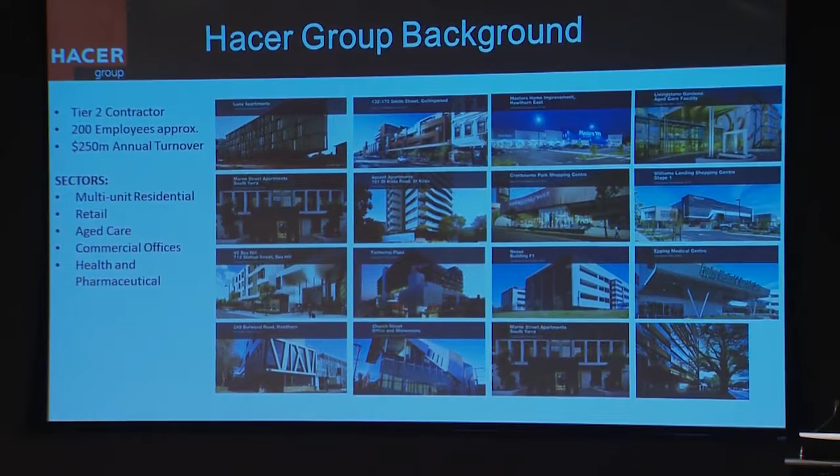A little bit about myself, my qualifications. I've got a degree in architecture, I'm actually a registered architect - as I like to say, a recovering architect. That also gives me the excuse to wear funky glasses, and I did button my shirt all the way up to the top to make myself look like an architect. Yeah, a lot of people pick on me for that.

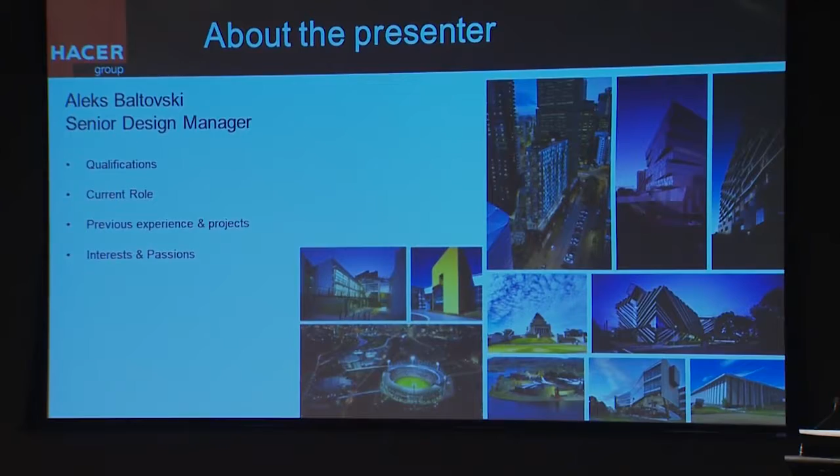But I am passionate about design, and one thing a lot of people don't realise is that I also have a qualification in construction management and economics. I spent a fair bit of time at university doing 2 degrees, and that's what I've loved about the role I'm in - it combines both the best of both worlds in terms of dealing with construction and design, and how design can be delivered into construction.

So my current role is senior design manager, I think that was covered in the introduction. In terms of previous experience, this is just a snapshot of the projects I've worked on, starting from the most recent one. If you work backwards, that was a project I worked on in Canberra in the late 90s.

In terms of experience, I've worked as an architect, as a design manager, as a contract administrator, I've even done time as a quantity surveyor - pretty much an all-rounder. So I've seen the world from all sorts of different sides.

In terms of interests and passions, there are probably too many to mention, but I am passionate about environmentalism and sustainability. One pet hate of mine is seeing waste, too much waste in any sense - time, money, resources, whatever it might be, materials.

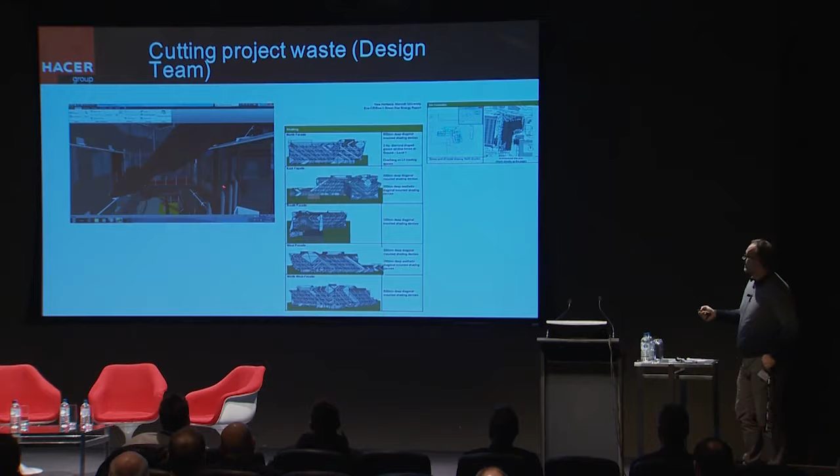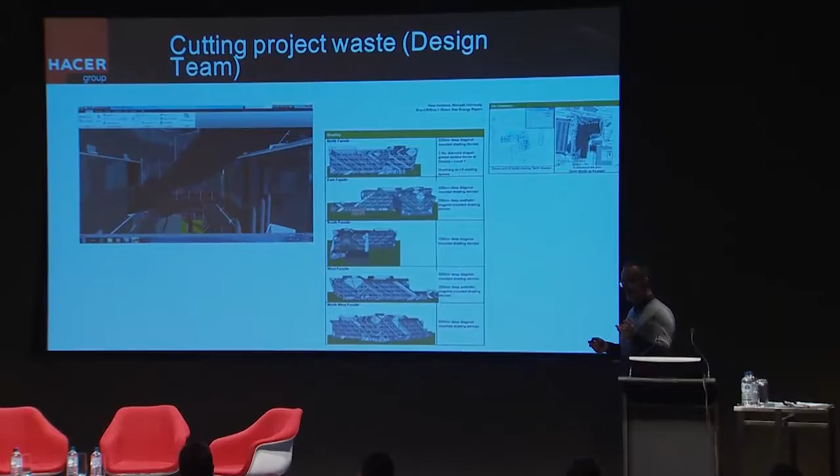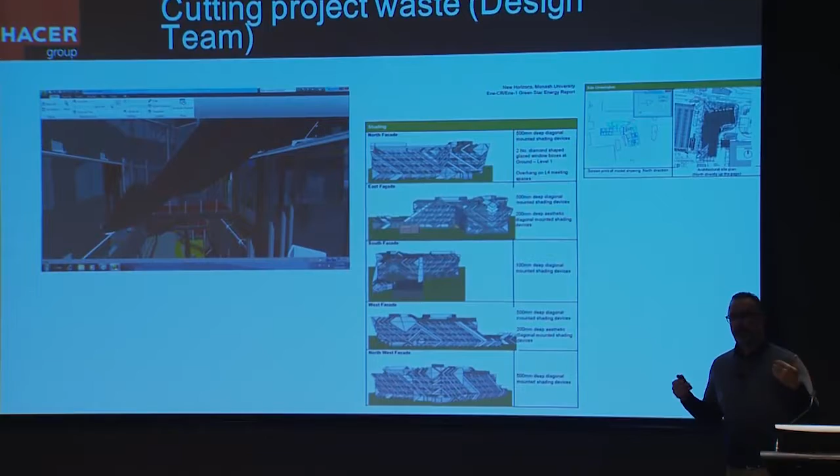Let's dive into some examples of how project waste can be reduced from a design or consultant's point of view. On the left is a screenshot from Navisworks showing a simple stair in an atrium, where you can see the architectural model overlapped with the structural model. When I first saw this image, I realized there was waste there because two different groups had modeled the same thing twice - a bit of doubling up. That was an opportunity where rather than building everything twice, people could talk to each other, give the structural engineers time to generate a structural model, and then overlay it into the architectural model. That's one opportunity to do that.

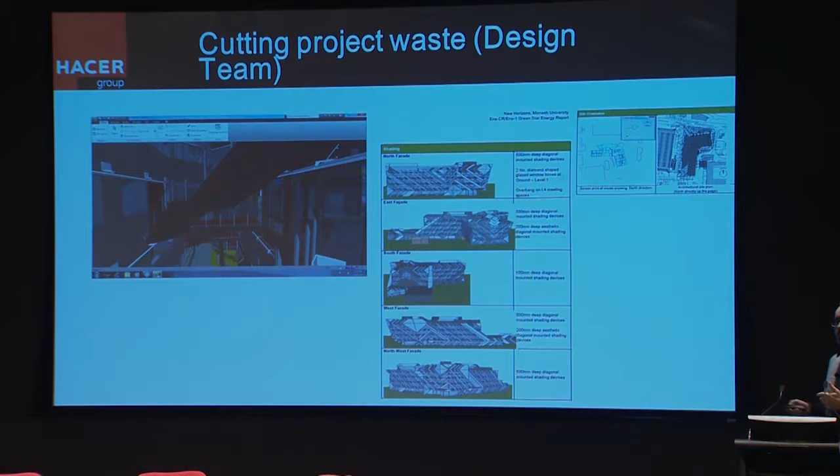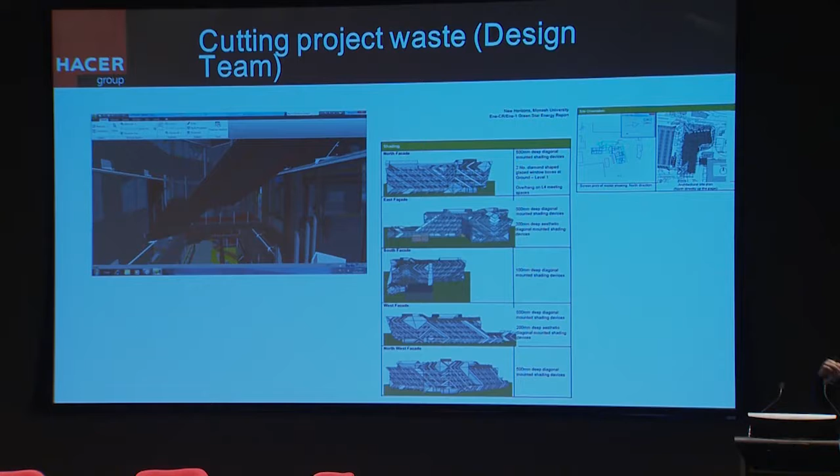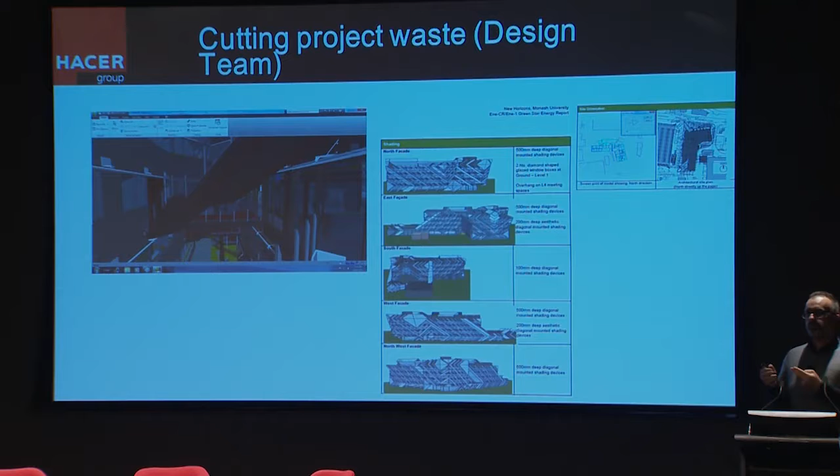On the right are slides where the models have been used in the correct sense - the latest architectural model was used to generate an energy or thermal performance model by the ESD engineer for the project. But on many occasions, I've seen models totally regenerated by engineers, sometimes looking nothing like the actual architectural model. Not only did they waste time regenerating the model, but they also didn't get an accurate result in the final report. So this represents doubling up that was done previously, versus in this case, engineers actually being able to use the architectural models.

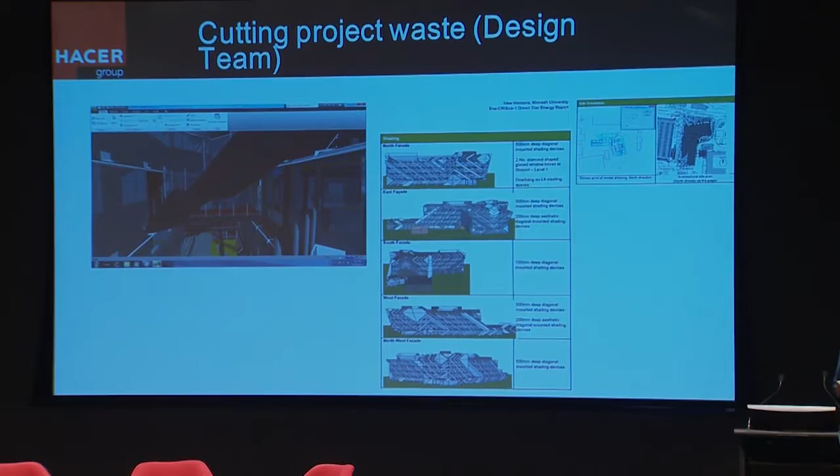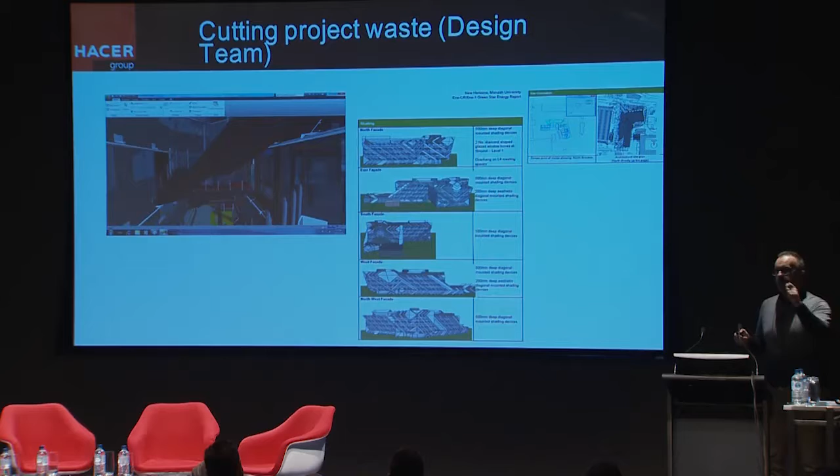A couple of other examples I can think of, though I don't have slides because they're hard to represent - another way to cut waste on projects is for quantity surveyors to extract quantities from accurately built models at the press of a button. I remember when I used to work as a quantity surveyor, back when you had to go over hard copy drawings with a scale ruler and colour in all the drawings to make sure you'd covered everything. These days, if the models are done accurately, that process can be reduced by probably 90%, if not higher.

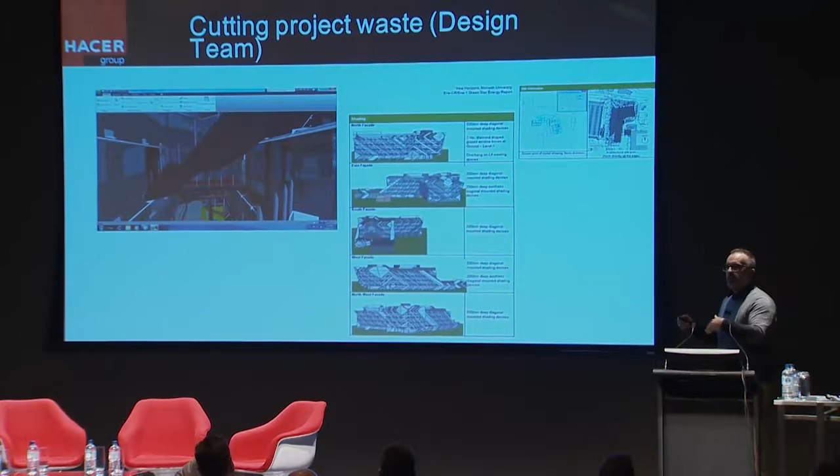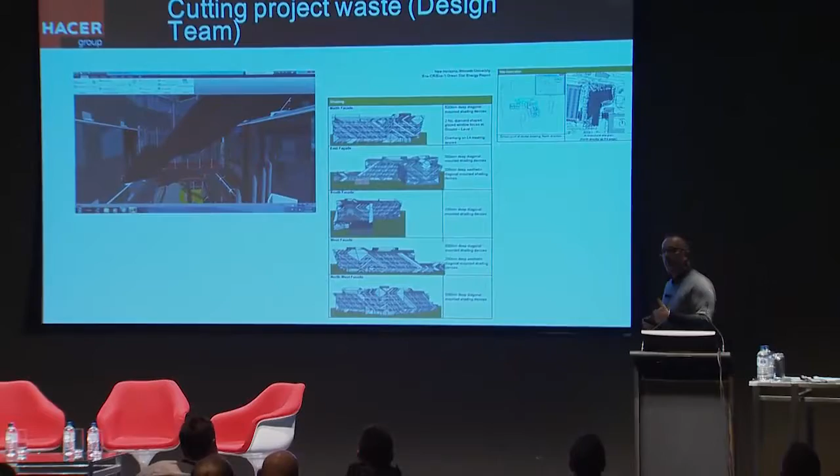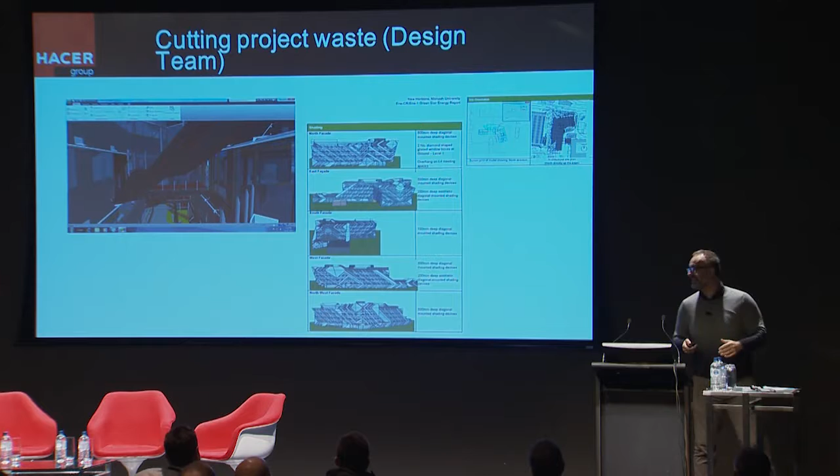Another example is the same for building surveyors. A common argument I have with building surveyors these days is about providing them hard copies of drawings so they can stamp them to issue a building permit when construction starts. Being able to do that electronically through a model would eliminate the process of someone having to stamp 4 sets of drawings. Just the thought of someone at the building surveyor's office literally sitting there stamping probably 1,000 drawings with a manual stamp does my head in, honestly, when you can actually do it electronically.

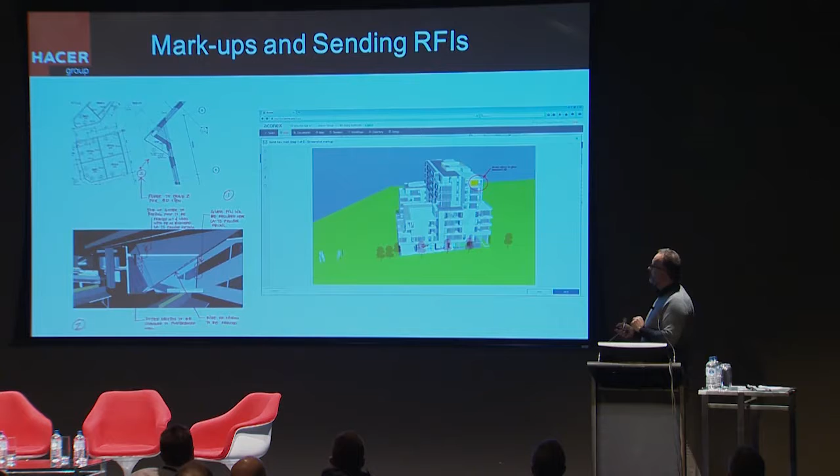Another example of what Rob mentioned before is the way markups and RFIs can be sent. The two slides I have here show on the left the way things were done in the past - that's an example from a project I worked on between 2010 and 2013, the Monash University New Horizons project, where the company I was with employed BIM for the first time.

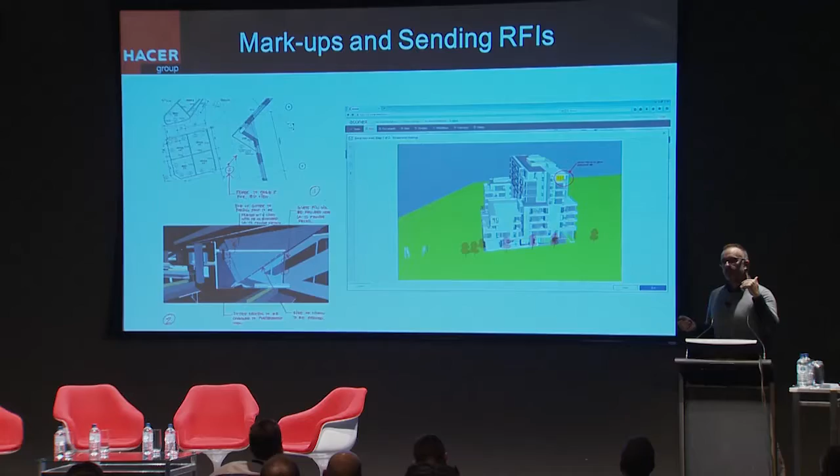This is literally a printout of an RFI that I sent to the architects, which involved printing out a 2D plan with hand markups, a printout of a 3D view of the model again with hand markups, scanning it, saving it, and attaching it to an RFI in Aconex. A 5 or 6 step process that normally would have taken about 15 minutes.

Through the connected BIM tool, you can literally do it through the interface on Aconex, where you can see the model, highlight an object, which is that window highlighted in yellow there, circle it and put a note, literally by the press of a button. I actually didn't do it in this case because the architect would have been confused by me asking a question about the window, and it would have gone through as a real RFI. It actually opens up an RFI and off it goes. So that's only a 2-step process that probably would take no longer than 2 minutes.

Another way of reducing waste.

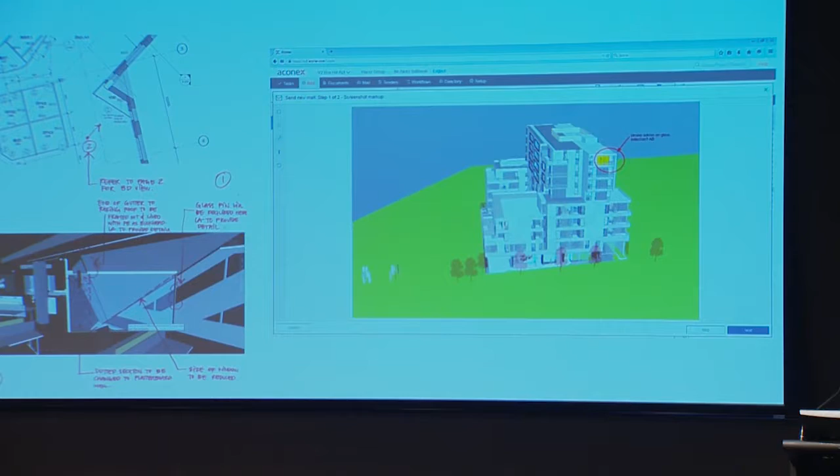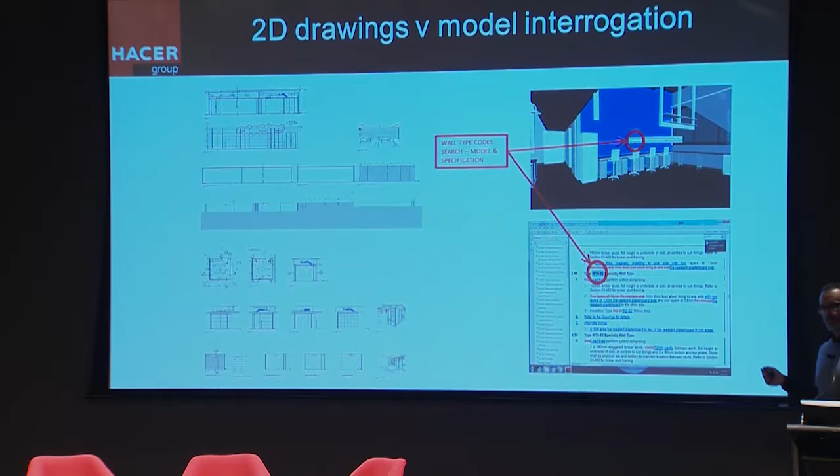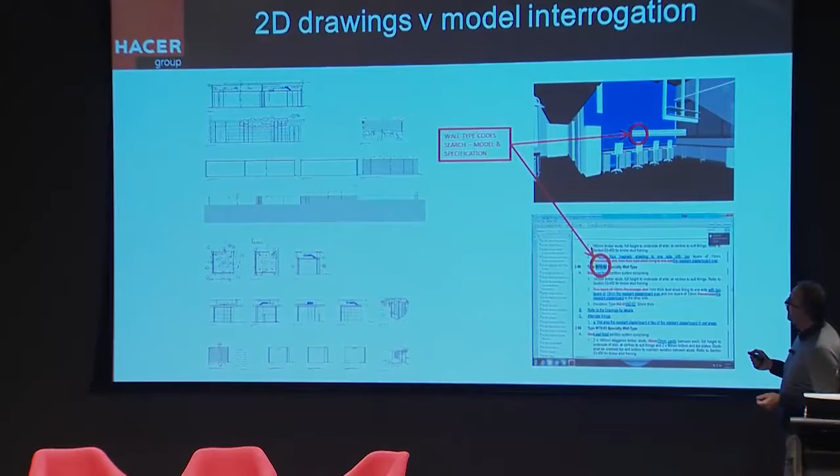This is another example showing how 2D drawings can be used the traditional way versus interrogating a model to find out what information you need. On the left is a traditional way of documenting a project. These are 2 out of 300 drawings on a $65 million project, where the architects generated massive amounts of drawings. But when you look closely, there's probably only a couple of drawings that actually show the information you need, like codes and dimensions. The rest of the drawing is of no use.

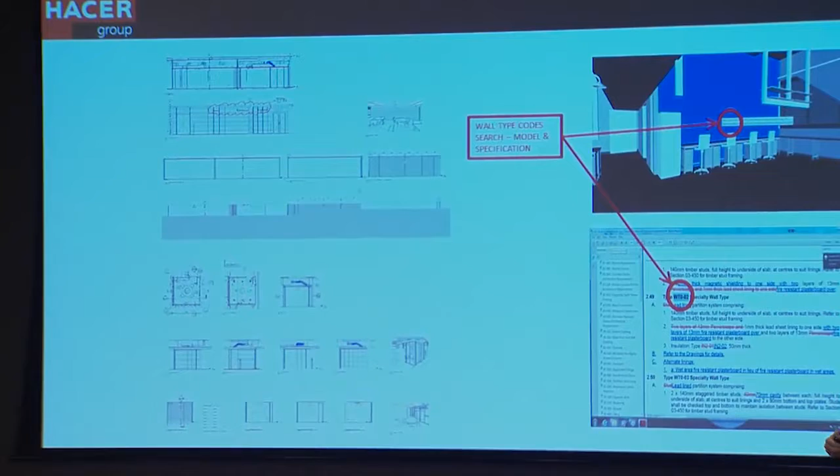When I first noticed these drawings, I asked, where's the codes? How do I know what type of wall that is? The response I got from the architects was, we have a policy of drawing things only once, so to find the wall type, you have to go to the floor plans. I said to them, there was probably no need to generate this drawing.

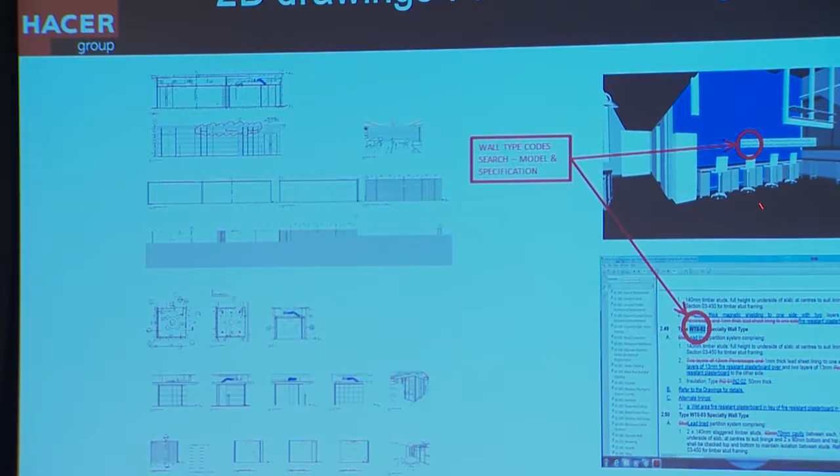What would have been more helpful is to give us a model so we can interrogate it by clicking on objects, get the properties, and then find that code in the specification, which was literally a PDF file, by doing a Control F command.

The way I used to do this at the time of that project was to have the specification saved on my desktop so I could open the PDF and do a quick search for that function. A lot of these drawings produced by the architects had a lot of work and detail in them, but in some cases they were drawing elevations of blank plasterboard walls. I don't mean to be critical, but I think we all know what a blank plasterboard wall looks like in elevation, so there's probably no need to generate that.

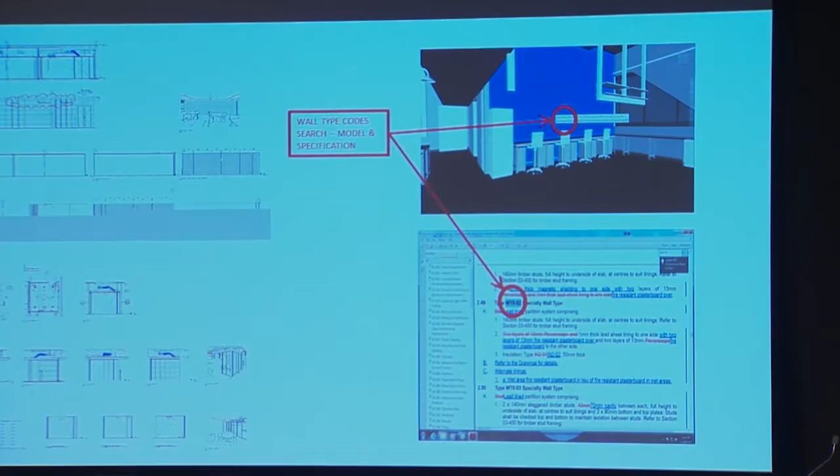Again, I'm trying to say that this can reduce the amount of work you have to do and make your job easier. That's how things were done then.

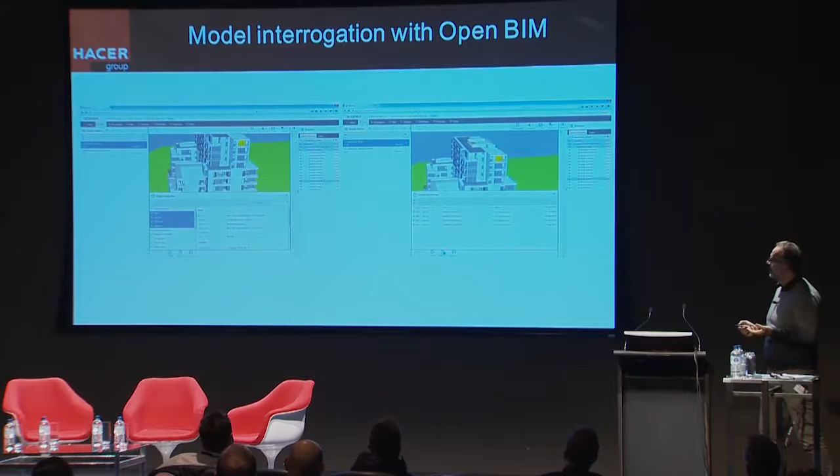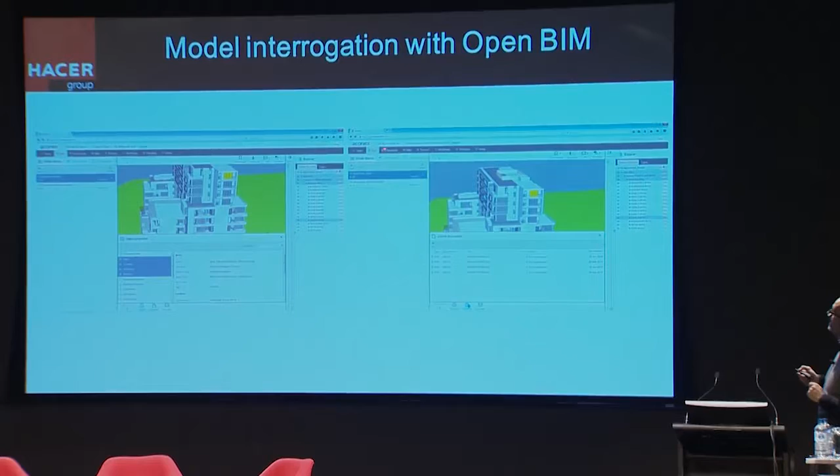This is the latest - 2 screen grabs from the Aconex connected BIM module, where it shows highlighting an object through the model and gives you the properties of that object. It also allows you to attach other documents that already exist in the document register in Aconex. Again, it cuts down the process, so you don't have to interrogate things for long periods of time using 2D or traditional old-fashioned documentation.

Some of the other things we also implement at Hacer, probably more so than other tools from Aconex, are the workflows when it comes to reviewing shop drawings. So the next step for us will be to actually review models using the workflow process through Aconex. Again, through Open BIM, it opens up the collaboration between all the different stakeholders taking part on the project.

The one last comment I want to make is about the model stack and the ability to overlay models over each other to coordinate and find where the issues were. Just as recently as last week, on a project we're working on at the moment, we had an issue of drawings that was due yesterday by the design team.

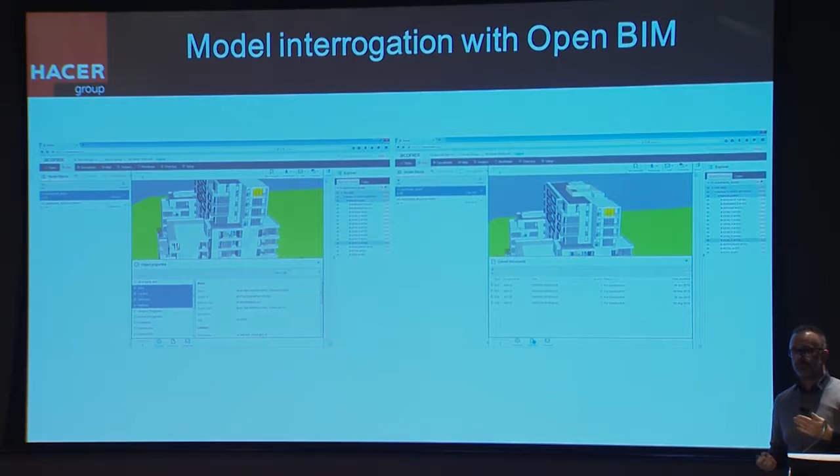The architects were supposed to issue what was commonly referred to as the frozen architectural CAD backgrounds to the rest of the team, to be able to catch up with the rest of the design. There was a bit of back and forth because the comments I got from the architects were that there's still some stuff not quite right in the model, so they didn't want to issue it.

So I literally had to put my foot down and say to them, look, we have to draw the line somewhere. I know that not everything is going to be resolved, but we have to issue something to be able to let the other guys catch up.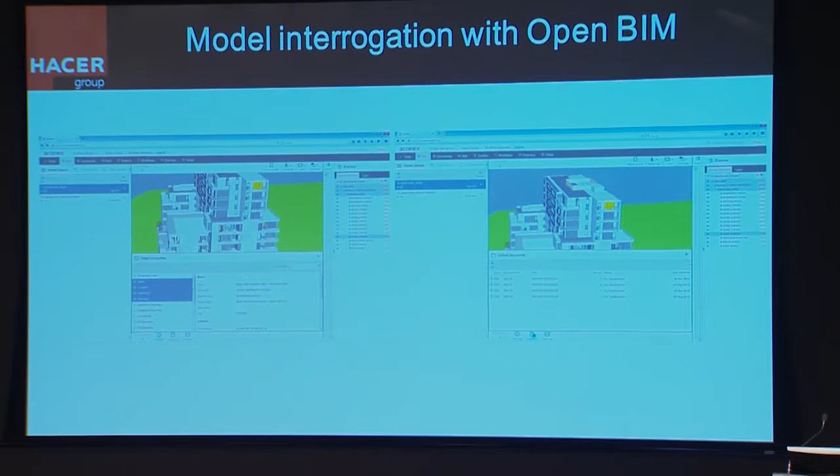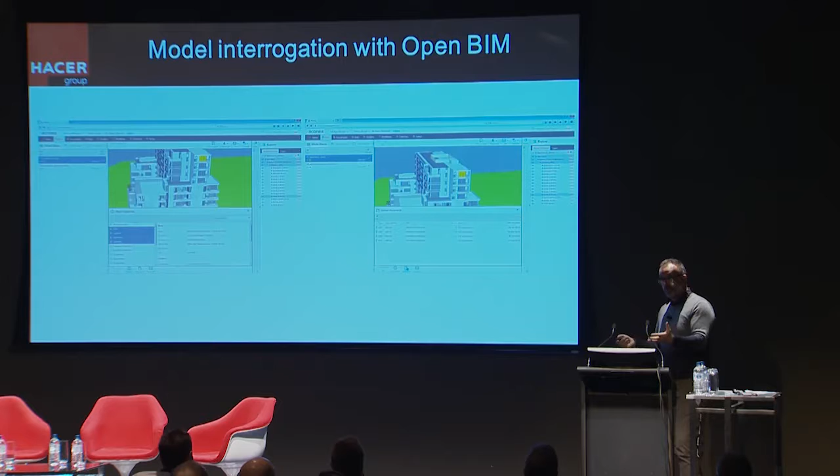So those sort of arguments will be avoided just by the fact that if you let people update their latest models in the stack, the overlaying of models will be continuous, an ongoing process where coordination issues are resolved. I think everyone gets a little nervous when they have to release information to others and the models aren't 100%. This frees up their hands to say, yep, we know it's not right, and this is why we're doing it, to fix these things.

So where to from here? Mobility - the use of mobile apps already present in the marketplace, such as the Aconex app, the Field mobile app, plus BIMX. Just last week I realized you can download models through Aconex using the BIMX app and view it on touch technology, smartphones, or tablets. Also, the BIM 360 suite of apps.

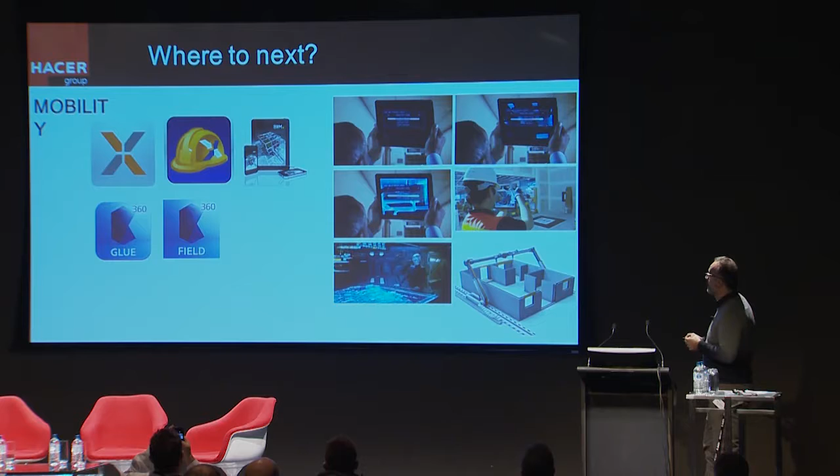Once we perfect that - and I can speak of a couple of great examples of how beneficial the mobility aspects of the technology are from a contractor's point of view - it can improve the quality you deliver on site, because you always have access to the latest documentation through the Aconex app, and you're also able to track defects throughout the process from an early phase on site. Just by that, you're reducing the waste or rework you have to do continuously on construction sites.

Where things could lead from here - new technologies like augmented reality on construction sites, holographic models, and 3D printing. I don't want to take too much wind out of Rob's presentation - I think he'll probably touch on that after I finish.

So a few closing comments, as a message I want you to take away from here today, is that it's not meant to be easy. This is why we're all here, trying to find a better way to do our jobs.

You won't believe, for the number of successful or good news stories I have in terms of using BIM, I can probably match that same number with bad news stories where people still tell me they'd rather look at 2D drawings rather than a 3D model, where people would rather look at 4,000 shop drawings rather than looking at a 3D model.